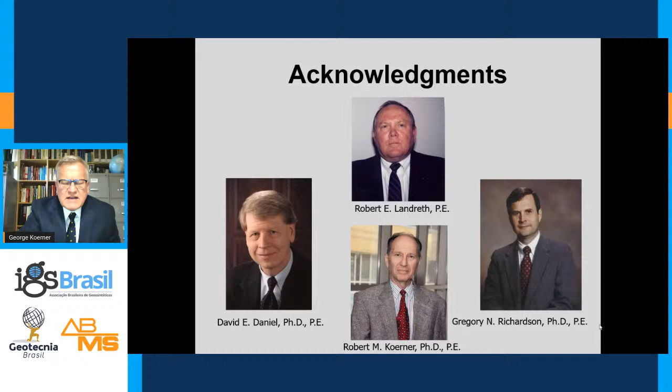As far as the background for this is concerned, you do have publications supporting what I am giving to you. The reference that I would suggest you obtain is the Daniel Koerner Waste Containment Facilities. It's an ASCE publication. You, however, can also get this document, just about 90% of it, free of charge from the US EPA off of the internet.

The objectives here, and we have to be very clear what the objectives of all this work that I'm describing to you is. It's certainly to minimize leakage, and the emphasis here is on the word minimization. Realize that the target is to get no leakage, but in truth, the targets are to get leakage below 50 liters per hectare per day, or that equals 5 gallons per acre per day.

The QA personnel on site, whether they be field technicians, inspectors, or QA monitors, are there to improve the state of the practice of what's going on, and also to help out with communication. This is communication of the stakeholders on the project. And please realize that we are protecting the environment. We are truly stewards of the environment, and it's our task with this series of events to certainly minimize the risk to the environment.

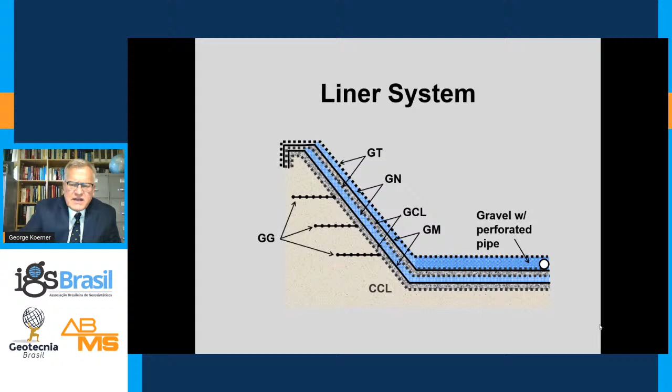Liner systems that are out there, I realize they're different depending on where you are, but double composite liner systems are typical in the United States. Here you see that in cross section. We start from the ground up, the subgrade, and then typically a geomembrane, GCL, then a drainage net, a geotextile over top of that for a filter system.

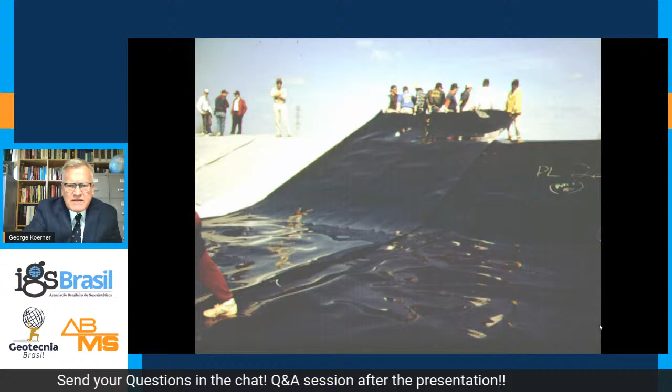This is the detection system, then another membrane GCL, which is a composite liner system over top of that. Here you see the entire liner system in its glory: the subgrade soil, the GCL, the geomembrane, the net, the textile, the GCL, the membrane, and then a heavy needle punch non-woven textile system.

This liner system is replete with geosynthetics. We're typically doing long longitudinal cells, and it's staged and managed construction.

Now let's go to the top side. You see again a composite liner system, typically a GCL with a geomembrane over top of it. You have a gas venting layer underneath that, and then on top side you typically have a drainage geocomposite and some sort of veneer reinforcement over top, and quite possibly a geosynthetic erosion control material over that.

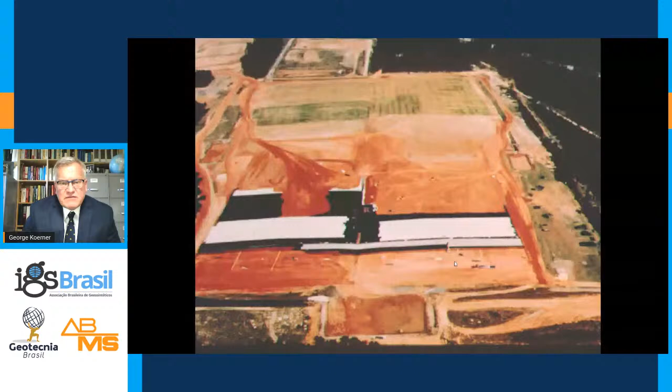They're complex covers as well. This happens to be at a low-level nuclear facility at Savannah River. You see the cross-section; the geogrid was even installed for minimizing differential settlement in the cover.

So you have the cross-section of the landfill. Here's the cover system—I even held back a little bit. There could be geogrids or geocomposites inside the waste mass if you wish.

But at a minimum, the final cover typically has 7 layers, inside the waste could have 2, and then the base material has 9. That's 18 layers, folks, of geosynthetics. And if you're in the waste containment business, I argue that you're in the geosynthetic business.

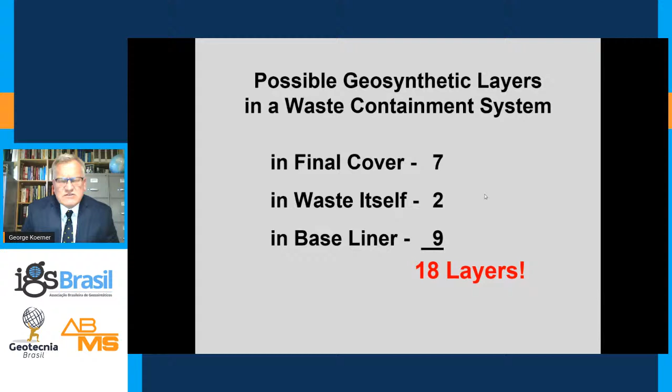You have to be competent in this, and you have to know that these materials are tricky. They're not self-evident, and we'd like to show you some of these tricks in regard to this presentation today.

In most cases, you are taking a geosynthetic and trying to make it equivalent to natural materials. Most, if not all, regulations allow this technical equivalency. The regulations, though, will rarely tell you how to illustrate that, and that's typically the role of an engineer. Nevertheless, geosynthetics have been generally accepted, and this table generated by Daniel Koerner and Richardson shows these equivalencies quite readily.

When you have barrier systems, they typically in a natural material were compacted clay liners. For geosynthetics, they're usually geomembranes and GCLs, or a composite of the two. The barrier system—geomembrane CCL, and then geomembrane CCL GCL—is quite typical.

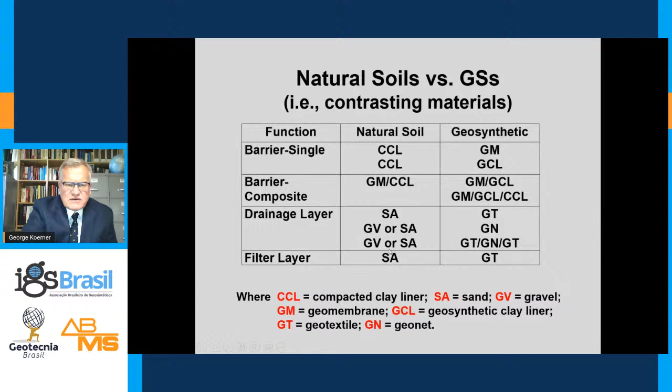As far as drainage layers are concerned, they're typically sands and gravels in the natural environment. These have been replaced in large part by textiles, nets, and geocomposites. In regards to filters, we typically have sand, and now we have a plethora of geotextiles which can be used in this case.

You should understand the organizational structure of the QA component and QC component—these are the stakeholders, so to speak. You have an owner of the facility, a designer of the facility, the QA organization which is typically separate, then a permitting agency, which could be both state and federal, a program manager and contractor, and obviously the soils component as well.

These stakeholders typically have a minimum qualification associated with it. The designer typically has a PE license. The manufacturer has experience, and typically there's a given number of 1 million square meters of material produced. The installer has experience as well and might have a certification. MQC is typically ISO 9000.

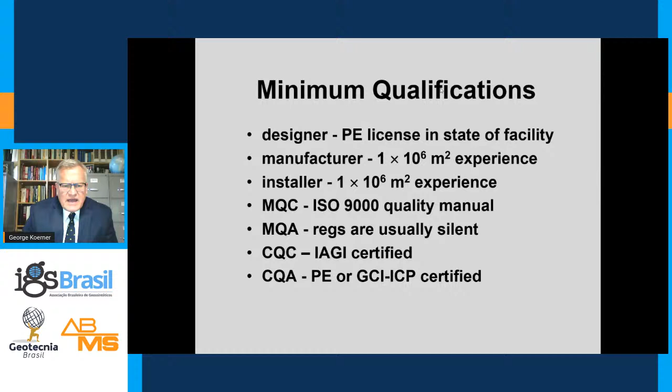MQA—the regulations are typically silent in this regard, but we're seeing them being pressed a little more as far as CE marking. CQC, as far as construction quality control, this is IAGI certified. We're seeing the installers, and many in South America having this IAGI certification. And as far as the CQA, PE or GCI ICP certification for the techs.

You have to realize that the rules at a facility are governed by the plans and specifications. I can talk to you about minimum technology guidance and these suggestions that are made, but please realize quite apparently that the plans and specifications for a particular project govern how you're going to conduct yourself out there.

They're typically prepared by the QA organization. The purpose is to supplement or augment the plans and specifications. You present all the details in these documents, and it should be part of the permit process. The contractor and installer, as well as the QA firm, obviously need to read this and review it before bidding on the project.

There should be absolutely no surprises once the dirt starts flying or the polymers start flying. There is much documentation associated with this: daily inspection reports, daily summary reports, inspection and testing reports, problems and corrective actions, drawings and records, photographs, final document certs, document control lists, storage records, and on and on.

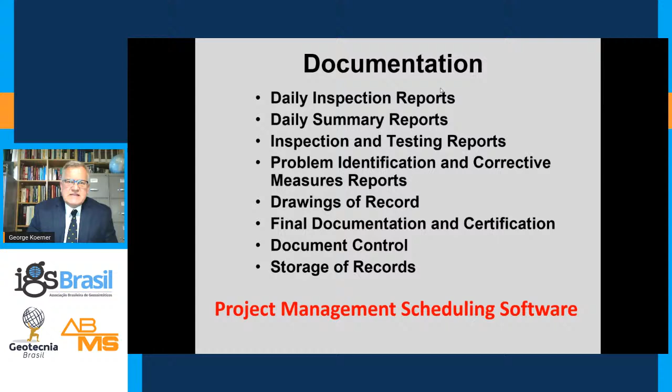All of this is now being monitored by project management scheduling software. Just like we're using remote and virtual ideas, this is paramount now in construction quality assurance. You see people out there with laptops and iPads making these documents, and there's a whole cottage industry supporting that project management and scheduling. There are meetings associated with this: a pre-bid meeting, resolution, pre-construction, and progress meetings.

All of this, which I have just described to you, is freely available in that EPA 600 R-93 document, which is available online and will give you about 90% of what the ASCE Koerner Daniel document gives you.

So that's a brief introduction, just a view from 10,000 feet of what we're going to talk about in this presentation. I realize most of you on the line are very familiar with geosynthetics and containment systems. However, I would be remiss if I didn't go through it just a little bit to catch everybody up on the same page of what I'm talking about with these polymers used in below ground construction.

Typically, the categories are membranes, GCLs, nets, textiles, grids, plastic pipe, and geocomposite. What I'm going to speak mainly to you about is the geomembrane, which is the polymeric barrier used in these containment systems. It can be smooth or textured.

It can be scrim reinforced. It can be different colors. Most of them are black, but some of them are white, and we'll go through all of that.

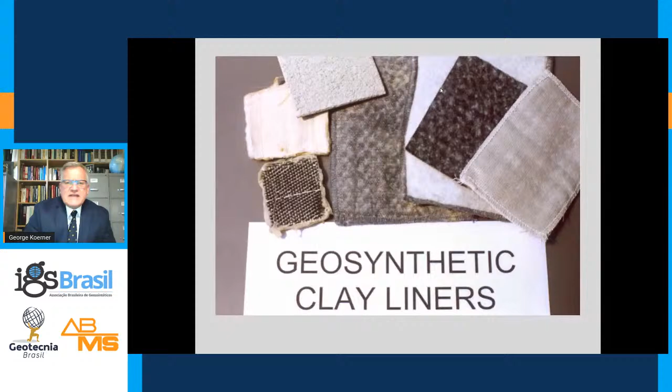There is GCL, which is typically bentonite clay sandwiched between two different geosynthetics. This clay swells profusely, it can absorb 300% moisture content, and it supplements or replaces a compacted clay liner and is used with the geomembrane as a composite liner system.

You typically have geonets, or in Europe they're called geospacers. These materials are three-dimensional, and they can transmit fluid, either gas or liquid, in the plane. They have a transmissivity associated with them. There's biplanar as well as triplanar nets, and it works well for leachate collection and removal systems, as well as detection systems.

Probably the oldest of the geosynthetics are geotextiles, two major varieties: non-woven and woven materials. They can solve a plethora of different issues, and certainly are well received and well used throughout waste containment.

Geogrids are three different types: punched and drawn, coated, which is typically polyester, and strap type. They almost always reinforce soil. Soils are notoriously poor in tension, geogrids are excellent in tension. The composite of soils and geogrid can be equated to concrete and steel — same scenario there. The geogrid, like steel, is taking the tensile forces.

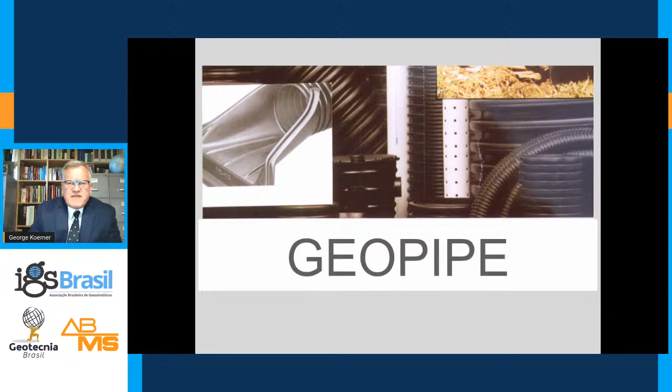There's plastic pipe. This can be perforated or smooth. It can be corrugated. Typically, the pipes that are available are polyethylene, HDPE, and PVC. You then can have a composite of these materials, which are addressed, forming just the endless array of geocomposites.

You should know the primary function. Here you see the different geosynthetic types that we went through. The primary functions are separation, reinforcement, filtration, drainage, and barrier. The geomembrane and GCLs will behave as a barrier.

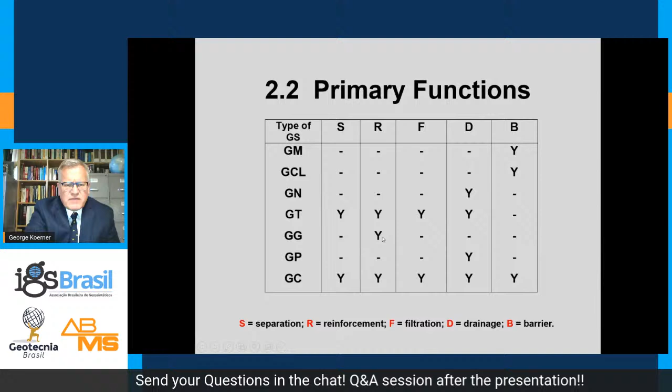The net will behave as a drain. The textile can behave as many things, and it even could behave as a barrier if you shot it with a bitumen. Geogrid is reinforcement. Geopipe is drainage, and then obviously a geocomposite acts as all of them.

This equation is how I would define an engineer: it's a factor of safety equation with a test property in the numerator. In the denominator, you have a design property. The test value is typically an ASTM or ISO test method, and the design value is typically, these days, a computer program.

You have testing issues. These are utilized through Committee D35 in ASTM or ISO TC 221. There's many standards which are available to you and essentially called out in specifications.

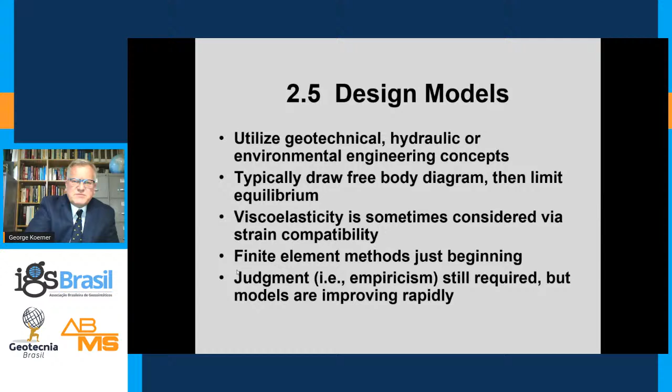As far as the design models, which are in the denominator of the factor of safety equation, they're utilizing geotechnical, hydraulic, and environmental engineering concepts. There's a litany of different programs available to you, and certainly some engineering judgment has to be used, not only in data entry but also the analysis of this.

When you go into a factor of safety, there are two critical elements associated with it. One is time — are these facilities temporary or permanent? And the other is severity — non-critical or critical. And I talk to people as far as criticality: is somebody going to die over this?

That's a good analogy for severity. You can see the factor of safety for these different functions varies considerably. Certainly when you get down to a barrier, I don't know how much leakage is allowed. Obviously, I gave you targets earlier on, but if you want to get better than those targets, certainly the factor of safety would go to the moon.

In regards to generic specifications, the current thrust is to move towards this and uniformity. This is a major effort at our institute, and please realize on geosynthetic-institute.org, these specifications are available to you. I should point out to you that currently these specifications are being translated into Spanish. Certainly they can be translated into different languages around the world, and Portuguese might be next.

The role of the QA personnel is certainly to observe and document. They're basically the owner's eyes out in the field. The consultants that provide these services are certainly trying to minimize potential liability, and they're providing documentation of what was built and did it conform to the plans and specifications. Good QA, though, is more than that. It leads to project success, and certainly it's an assistance to all the construction managers out on the project, and ultimately the owner thinks that it's a worthwhile expenditure.

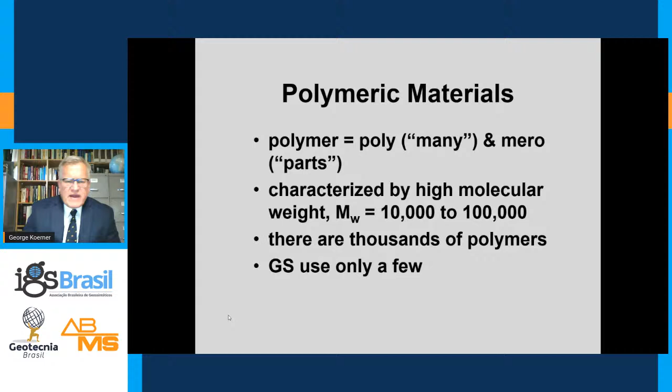The chart above now is defining the polyethylenes a little bit clearer in regard to density. Müller has presented this. Density is directly related to crystallinity. The more crystalline the material, the more chemically resistant the material. Also, the HDPE has very little branching in its backbone. It's very resistant to chemicals, and it's why it's used in liner systems. Linear low density has a little bit more branching, but also has a little bit more flexibility, and that's why it's used in cover systems.

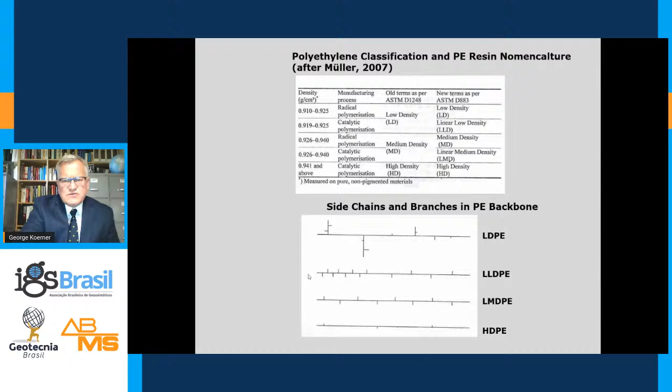Please realize I say HDPE, but this is a formulation. There's a recipe associated with this. The vast majority of the HDPE, or polyethylene, is resin, 95 to 98%. This material does have carbon black and additives associated with it. These additives and carbon black are only in there a few percent, but they're the expensive part of the formulation, and certainly needed to make these materials last a long time, even in harsh conditions.

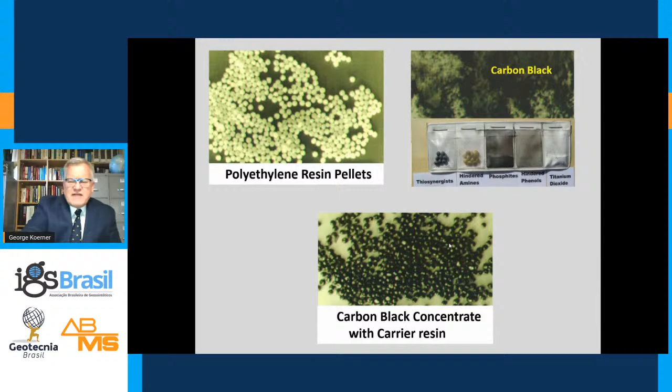A manufacturer needs to assure that this material is quality material and conforms to his internal specs. He also wants to make sure, he or she wants to make sure that this material is good material and what he paid for. So typically the quality assurance before the manufacturer will release this material into his silos at the plant is twofold: one is melt flow index and the other is density. They'll do these cursory checks to make sure the material is quality and what they're paying for.

Now we'd like to produce that geomembrane. And to produce that geomembrane, you typically have extrusion processes or calendaring processes. The olefin plastics that we showed you are the extrusion, flat die and blown film, and we'll show you both of that. As far as the calendaring process is concerned, that's typically PVC and also the scrim reinforced materials.

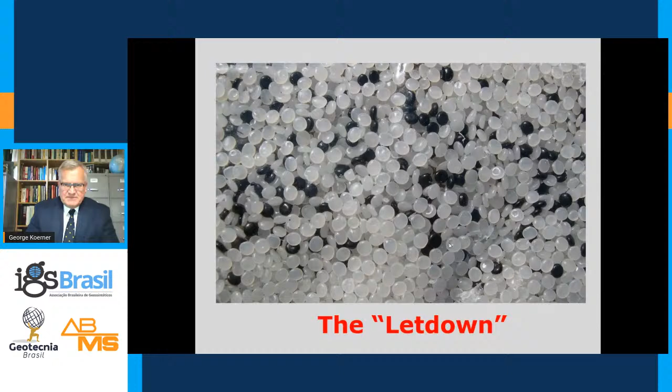So we take the resin and the concentrate, which is the carrier resin and the additive package and the carbon black, and then we have to make sure that we address regrind or rework. This is allowed at 10% into the letdown. And this is important, especially from a financial perspective for the manufacturer of geomembranes. However, this material has never seen use. It most often has never left the factory. This is quite a bit different than recycled material or reclaimed material.

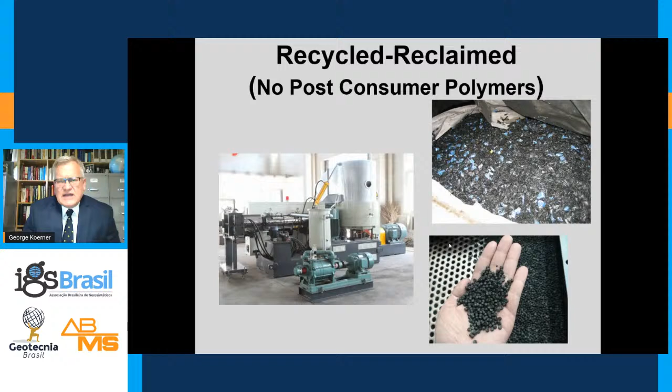Absolutely no post-consumer material is allowed in geomembrane manufacturing. This is strictly forbidden, even if it goes through a pelletizer and a washing mill. It's tough to detect, but certainly the formulation has to be guarded and protected against this.

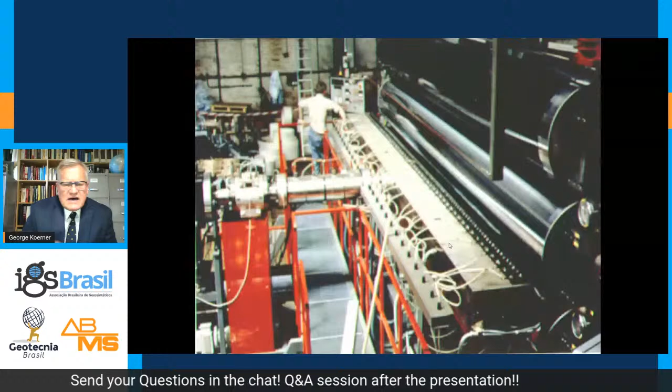Now we'd like to introduce that letdown and regrind into the extruder. That extruder is basically a large Archimedes screw with heaters on the side of it. It then feeds a die. In this particular case, it's feeding a wide mouth die. This die lip is about 10 meters across, so it's a very large die. It can be fed by multiple extruders and is spread out quite wide. Here you see the river of polymer, the river of geomembrane that's being produced.

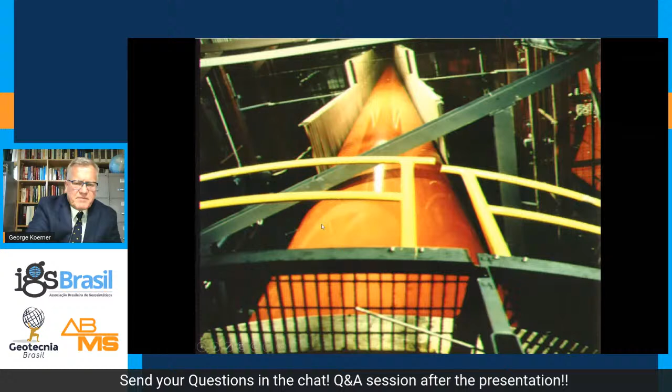It's on the cooling rack after the calendaring. This is very different from blown film extruding. Now the die lip is circular. We're looking down on it. The geomembrane is orange, just for a contrasting color - nice pictures to take. Now what we're doing is looking up at it. So the die is at the base here. It's a circular die, and the nip rollers at the top of the facility are here. So two very different manufacturing processes.

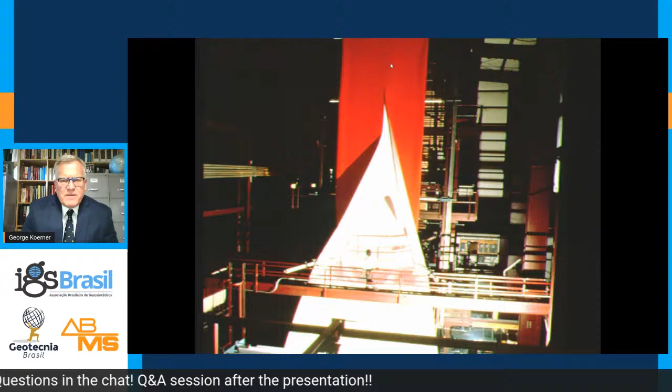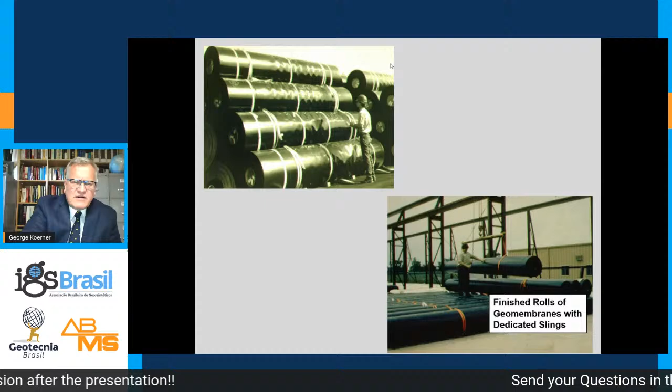You can add secondary and tertiary extruders to this for nitrogen expulsion or different colors. Here you had a different color inside, white. At the top of the nip rollers, it was slit open and then splayed forth to go on a roll-up wheel. These rolls are heavy after they're manufactured. You typically have dedicated slings associated with them, and this has to be moved around and labeled quite well. It's typically labeled on the outer wrap of the roll and also in the tube of the material. All of this is specified by the QA plan.

As far as texturing material, you have four different methods to texture. For blown film, it's typically a nitrogen expulsion. You can have a patterned roller for the die cast, or hot particle impingement. I've seen that in Chile as well as China and Europe. Hot foam lamination I see less and less of. That was a favorite of a manufacturer here in the United States, but we see less of that process now.

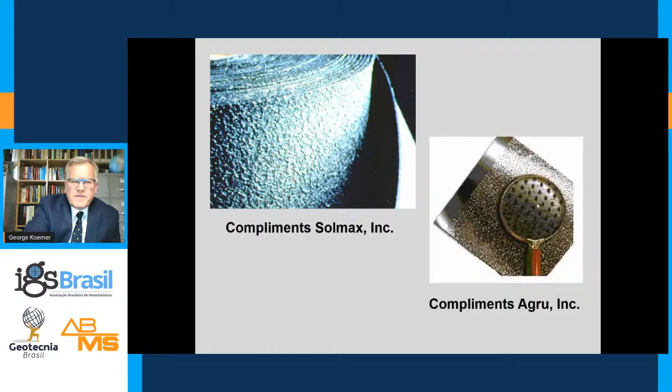The texturing is key for increasing the frictional interaction of the surface. Here you see the blown film in the upper diagram, and here you see a patterned texturing process. This has revolutionized the industry, particularly on steep slopes. You can have slopes now much steeper than 3-to-1. We see 2-to-1 as a norm, and this is obtained with textured geomembrane.

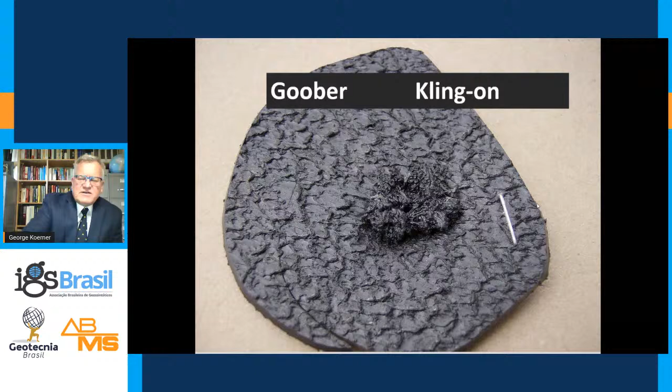In regards to textured material, if you're not cleaning the die lip, you can have excess material, which can agglomerate on the texturing surface and give problems. You can have gels or dirt inside this - the screen is not working well inside the extruder, and these foreign materials enter the sheet, which give problems and rise to stress cracking.

You can have problems with carbon black dispersion. These big carbon black agglomerates are problematic and certainly need to be taken care of. If you have water with a lot of humidity or a problem with water dripping on the equipment, it can bubble the material and cause problems.

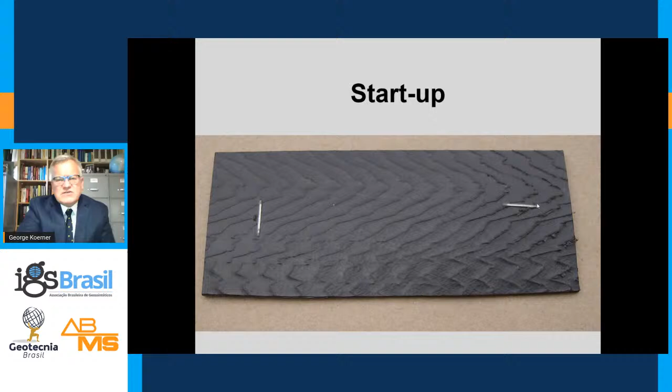You also have startup runs, which are between different materials - changing over from linear low density to high density, or changing in thickness. There could be startup issues. You don't want this material on your site. There could be problems with AO packages, which are found out in long-term problems. There could be problems with inconsistency or tiger striping of the material. Certainly, you didn't pay for this. This was not the material shipped for direct shear testing, and certainly is problematic and should be avoided.

Realize that there are specifications. These specifications are typically generic, which are the best specifications. You don't want specifications from a manufacturer - it's not that they aren't honest, but it's like the fox looking after the hen house. You need somebody independent producing these specifications. They typically address properties, test methods, units, limiting values, frequency, and then there's a warranty.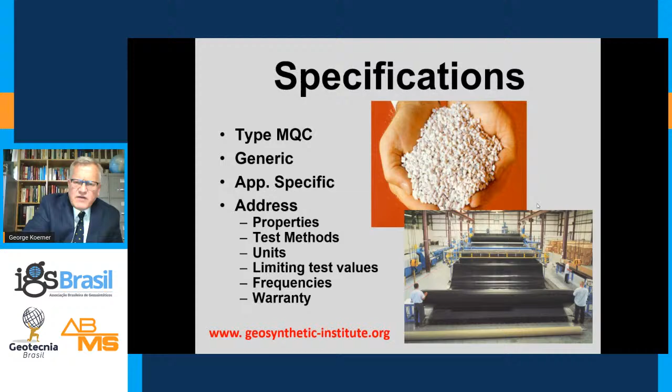There are generic specifications available to you. Our geosynthetic-institute.org provides them. They're openly available to you, and they're being converted into Spanish now, and hopefully other languages going forward. The test methods that are called out in these specifications should be tested by a manufacturer who's accredited, and also by a third-party laboratory which is accredited as well. They should be accredited to ISO 17025.

Certification includes CE marking, available particularly in Europe, but seen all over the world. Also certification of personnel looking after the site, as far as experience, referencing, and knowledge—they pass a test, then continue education. It's available to you, a very organized system, and this has been set forth by the US EPA. Hopefully it will take hold throughout the world.

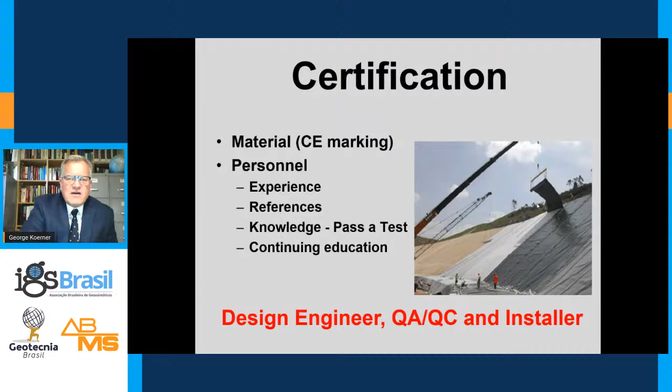Now we've manufactured the material and we'd like to ship it to the site. This is typically done in enclosed trailers or flatbed trailers, depending on the equipment for loading and unloading. QA sampling is best done at the plant. Transportation costs have become extremely expensive, so we need to head off problems as soon as possible. That testing is typically the responsibility of the manufacturer, occurring prior to shipping so you can inventory and hold any material that is off spec.

QA sampling in the field is certainly not as efficient, but sometimes it's called for. A failure if QA sampling is done in the field will delay the project significantly, and maybe the manufacturer doesn't have material inventoried that can be shipped directly to the site. Who pays for the shipping back and forth? This has to be arrived at earlier on in the project.

As far as shipping is concerned, this is typically done with organized equipment at the manufacturing facility. Here you see it's done with a stinger. This is offloaded typically with a low boy and a spreader bar, in regards to a container vessel.

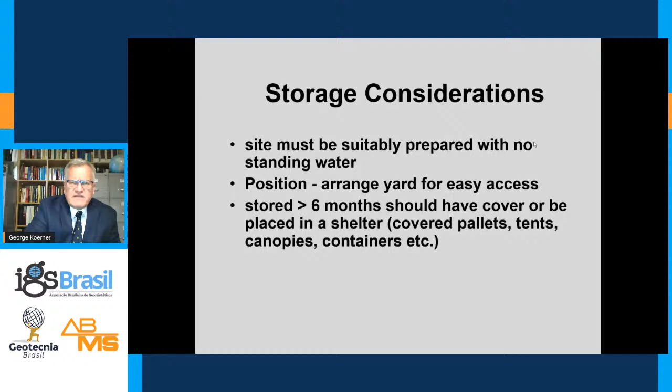If storage on the site is greater than 6 months, you should cover the material with some sort of shelter—typically covered pallets, tents, canopies, or containers. I'm seeing this a lot more often; owners are buying large quantities of geomembranes and storing them on site for extended periods. This is no problem, but they have to be stored properly and sheltered if it's over a 6-month period.

As far as field placement of the geomembrane is concerned, you have to prepare the subgrade. Follow the QA documents, follow the lines and grades. It has to be stone free and flat. If you're in the wintertime or near winter, in late fall or early spring, you should have no frozen ruts. Tire deformation should be less than 25 millimeters—nothing can be greater than 25 millimeters.

Remove folds in any underlying geosynthetic, and then subsequently get a subgrade acceptance letter. This is something the QA personnel needs to obtain from the earthwork contractor, and it has to be signed off by the owner.

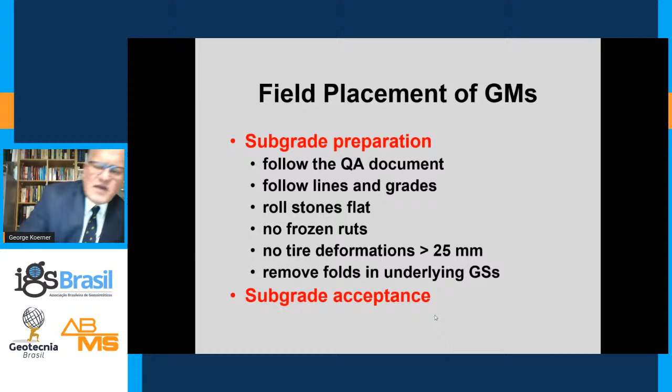To do this, you start with a site which could have some stony material, some greater than 25 millimeter size material. This material needs to be picked out—you can do that automatically with a stone picker or by hand. Laborers should have a bucket; they shouldn't be throwing the particles.

Obviously don't throw particles onto deployed geosynthetics. You then take a smooth drum vibratory roller and roll the site flat. This is to make the compacted clay liner ready to receive the geosynthetics.

This is a photograph I took at a site, and the owner asked me if this was appropriate. I said absolutely not. You can see where the material is near being punctured, where the material around the batten strip is under tension, and a lot of down-drag forces by the pipe boots.

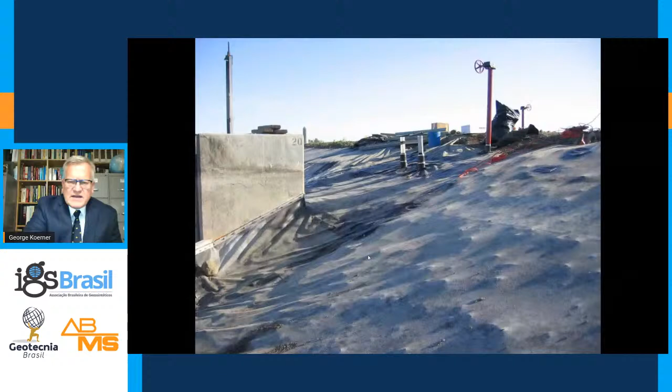This is totally unacceptable, and this geomembrane will be compromised over time significantly. It's an unacceptable way to install a geomembrane. You will have to protect the geomembrane when backfilling. Punctures by stones from both above and below are problematic. Cover soil must be free of stones.

If possible, the gravel leachate collection and removal system has to be separated from the geomembrane with a heavy needle punch nonwoven or a puncture protection material.

Geomembrane also cannot be trafficked by construction vehicles. There is some discussion around low ground pressure ATVs. This has to be agreed on, though, prior to the job. The ATV typically has special precautions, like entering the geosynthetic at a 90-degree angle, no fast starts, no on-off the geosynthetic. It has to remain on there.

In addition to that, if the material is to be trafficked, it should have a minimum thickness of cover soil over top of it. That's typically greater than 300 millimeters or 12 inches. Some regulatory agencies, like the Corps of Engineers, want 450 millimeters or 18 inches. But all of this is specified in the QA documents, the QA plans.

In regards to top side of the facility, the anchor trench detail is extremely important. This anchor trench is holding the geosynthetics topside. It has to be detailed in the plans and specification, and it's critical for safety, particularly when you get greater than a 3-to-1 slope or greater than a 30-meter slope in length, 100 feet.

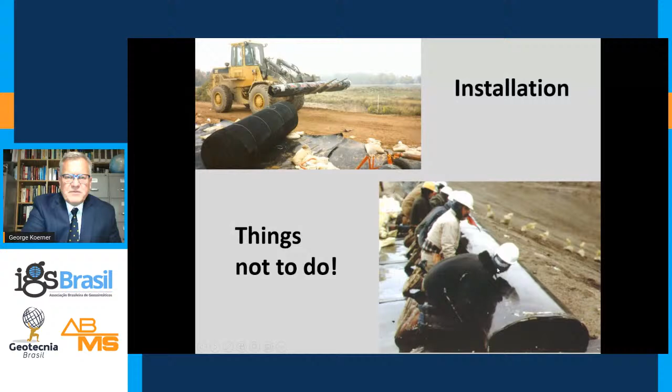This is a smooth geomembrane. The roll is extremely heavy, and they're about to throw it down the side slope in a very uncontrolled manner. This is totally unacceptable and certainly is not the way to do it.

Good delivery systems are shown here. This is typically equipment, a lull with an articulating boom and a spreader bar. This is equipment which is operated remotely. There's a toggle which the installer is here walking in back, making sure the overlap is correct. But this is certainly carefully managed and controlled throughout the system.

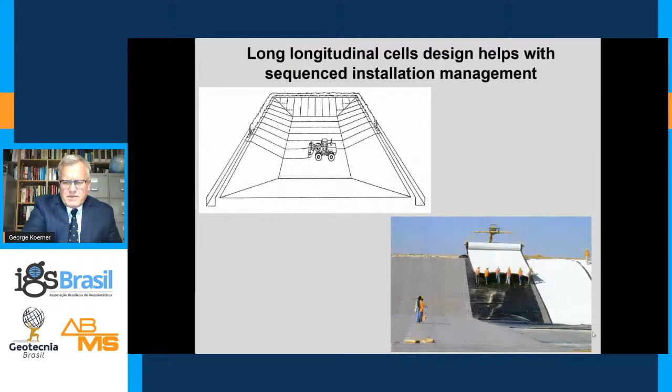You should address extreme weather, meaning extremely hot or extremely cold weather. There are recommendations in the EPA guidance documents which give you trepidation once you get colder than 0 degrees C, so the threshold is certainly at freezing. Special precautions for lower temperatures are needed. You can seam at lower temperatures, but you need to take precautions including preheating and moving enclosures, and the QA plans need to be specific in that regard.

There is direction both in IAGI as well as GRI GM9 which addresses these extreme conditions. In most cases, the QA personnel will have to consider extra trial seams. This is very important and is at the prerogative of the QA personnel.

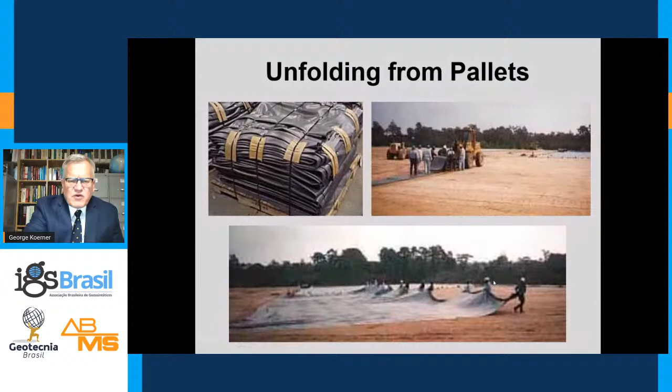I have been talking to you mostly about olefin deployment, either polypropylene or polyethylene. You should realize that PVC often arrives at the site in palletized form, much larger panels, and it's typically accordion folded and deployed in this manner. Off of the pallet, they back up, and a lot of labor is required to spread the sheet flat.

You do run into this predicament, particularly with surface impoundments. This is problematic in regards to the subgrade soil, which had much organics in it. Upon putting a black body over top of it, gas came out, or was expelled due to changing water table elevation, and ballooned underneath the geomembrane in regards to whales, sometimes called hippos.

You should certainly minimize subgrade disturbance. There is a concern with textured sheet - I showed you the rub sheet or Houdini trick, which is often used. There's also a concern with wind. These materials, you do not want them to be a kite - there are many cases of wind displacement.

The biggest item is not to leave the geosynthetic exposed too long. It should be managed or staged construction.

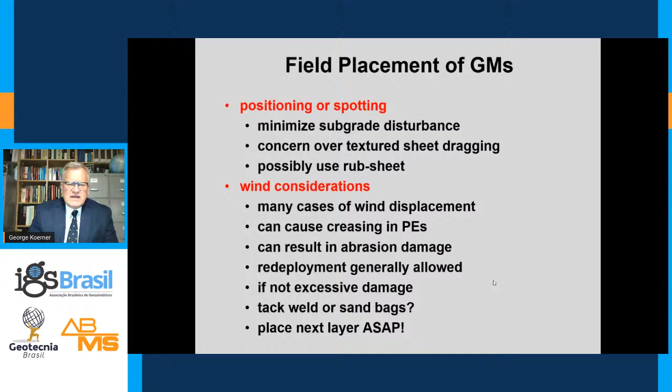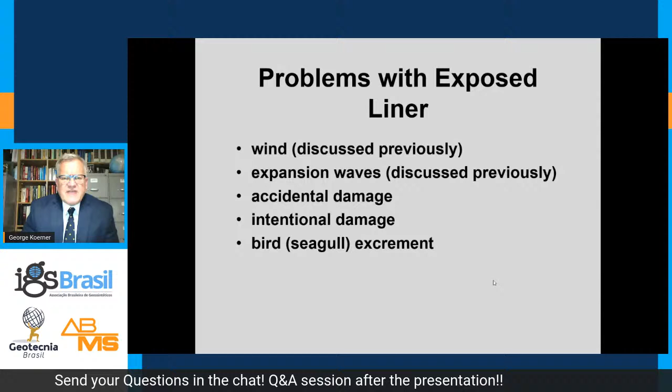There is a situation in regards to waves and wrinkles. Please realize most liners which are placed are composite liner systems of a membrane being placed over top of clay or a GCL. You can't entomb these waves because you will not have intimate contact. These waves or wrinkles fix into position, and this is a concern with residual stress and mini dams.

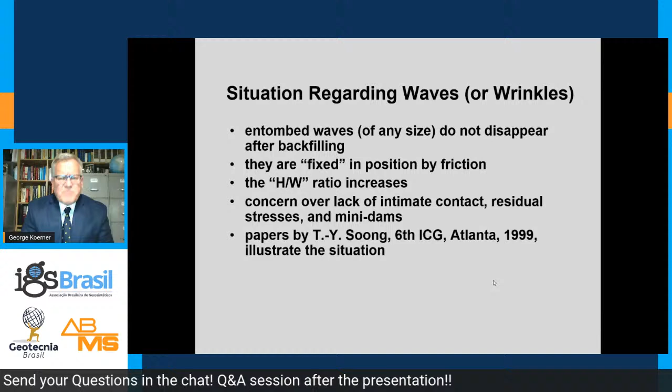There's excellent work that has been conducted on this. I point you in the direction of T.-Y. Soong's work with Bob Koerner. There's also work at Queen's University with Professor Rowe and Brachman at the QUELTS up in Queens, which are very good in regards to this work.

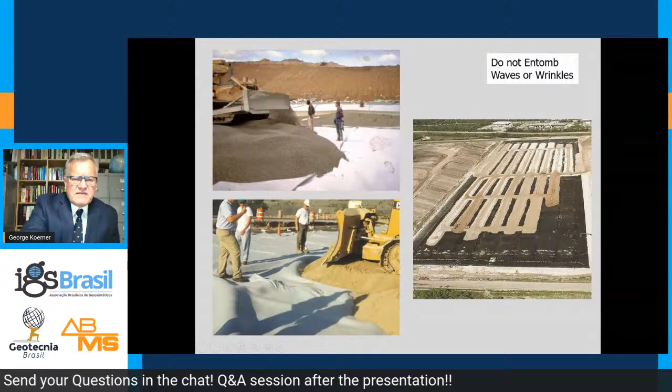It needs to be cut out and flattened, or you have to wait until a cooler period of the day until you continue this covering. You might want to stage this work incrementally so you get distributions of the wave.

There's a right way to do this and a wrong way, and certainly you need a press fit of the geomembrane against the underlying material. Concern over entombed waves is certainly lack of intimate contact, which we described in the theory.

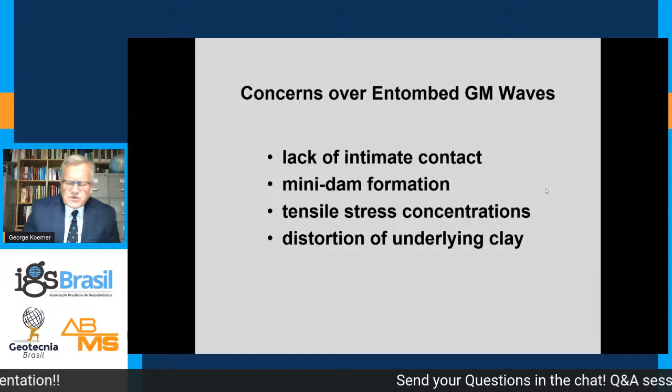Mini-dams which are forming and with sites that have limited hydraulic gradient thresholds, this is problematic. Stress concentration is problematic, and also a distortion of the underlying clay or GCLs.

Fixing berms and piles - this is available over in Europe. A company by the name of Schicketanz has certainly championed this with thick geomembranes in Germany and Austria.

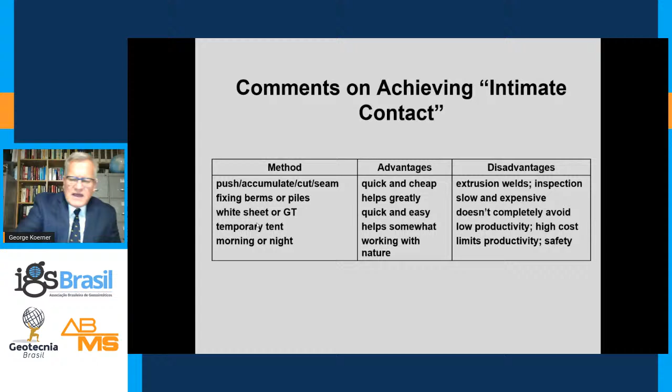White sheet and white and light colored geotextiles help. If you decrease the surface temperature of these membranes, you certainly have less wrinkling. If you can control the environment either with tenting or support structures, or do work in the morning or late at night, this is certainly proactive and will help you in regards to intimate contact, which is extremely important.

Okay, now we're moving on to seaming and joining of these geomembranes. Leaks do occur due to poor field seams. Factory seams are much better. Details around penetrations are certainly very important, and around appurtenances.

The crew must be well trained, and there is a requirement in some places that they're certified. The equipment must be maintained and is certainly tracked. These expert systems track both the operator and the equipment that they're using.

There are manufacturers that do have Teflon white strips, which are pulled off right in advance of seaming. There are heaters like salamanders that heat the location, or cases where you're wiping a location free.

Most of the membranes which we see, even textured membranes, have a smooth edge, and this is good for seam quality. Tie-in seams are quite ugly.

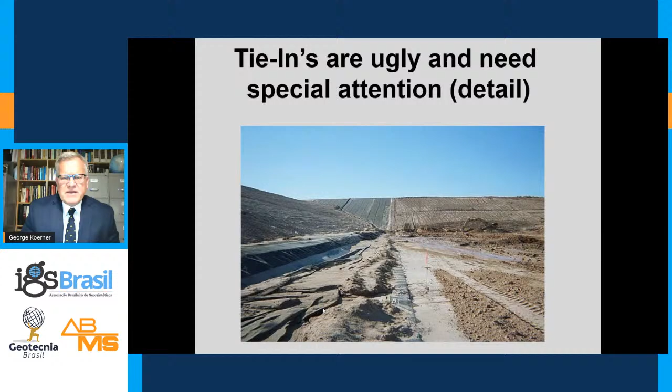You sometimes see a lot of elaborate protection systems. It can be with plywood or other geosynthetics which are pulled up in advance of the seaming, but certainly should be thought about with great care.

As far as the seaming methods occur, it's very dependent on the type of materials which are used. The olefin plastics, which we described, are seamed thermally, either through extrusion or fusion welding. Fusion can be done off of a wedge or hot air.

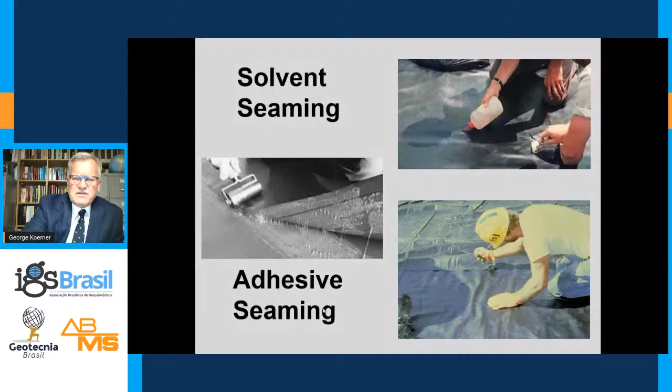Chemical seaming with solvents or bodied solvents are done with PVC and chlorosulfonated polyethylene. Adhesives are typically used with EPDM. Solvent seaming and adhesive seaming we don't see much of these days. Even PVC can be thermally seamed, although this is available to you, and we see it often in the roofing business, but not so often in the geomembrane field business except with EPDM.

Applicability of seaming methods - you see here the different methods versus the different materials, what's available and what's not applicable. This is developed again by Koerner, Daniel, and Richardson, and we're pretty much going to speak to just the thermal methods of seaming olefin plastics from here out.

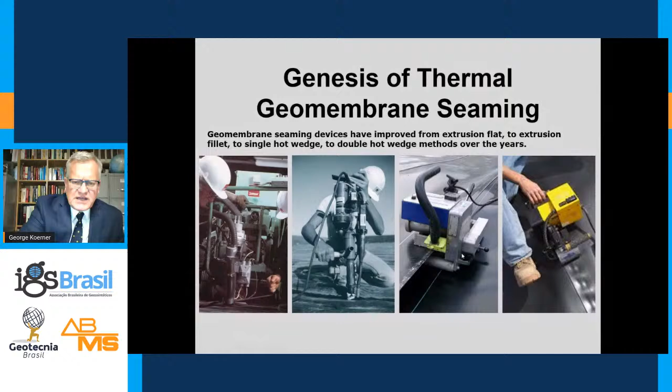There is a genesis of seaming of these materials. You see large flat extrusion, handheld extrusion, single wedge, and then double wedge material, which is available.

Wedge welding, typically with two tracks with an air channel in between, is the norm. This air channel is a non-destructive test, which is built right into the material. It's certainly the premier technique for production seaming, and it is highly automated and certainly the best type of seaming that we see out in the field.

This is the original patent from Pfaff, which was an Austrian firm, granted back in 1979. The big component of it was a Z-type frame with a movable wedge.

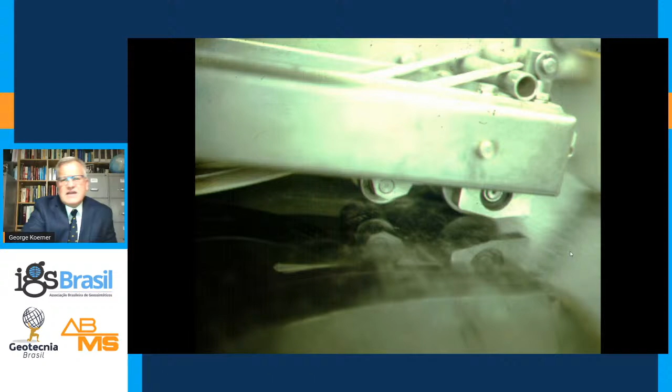You see the seamer here with a split nip roller, and the wedge is a brass wedge. The lower sheet is placed, the wedges move forward, the upper sheet is placed, and then the device is racked or moved to apply a normal pressure.

There are many different manufacturers of this equipment out there. You have to qualify the integrity of the seam as well as the integrity of the seamer or the installer. In this slide, we're making sure the overlap is correct, typically in the neighborhood of 100 millimeters so that the seam can be applied properly.

It's very different between longitudinal and butt seams. The butt seams on the roll ends are typically done with flat, solid wedges, where the longitudinal seams are done with split wedges using DualTrack hot wedge seaming. A single wedge seam is shown here - you see the area that's bonded plus the squeeze out.

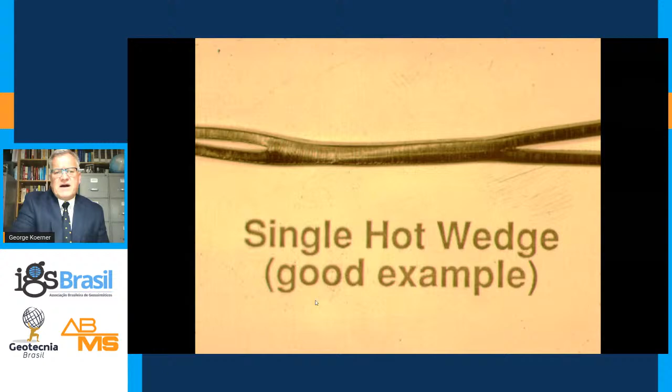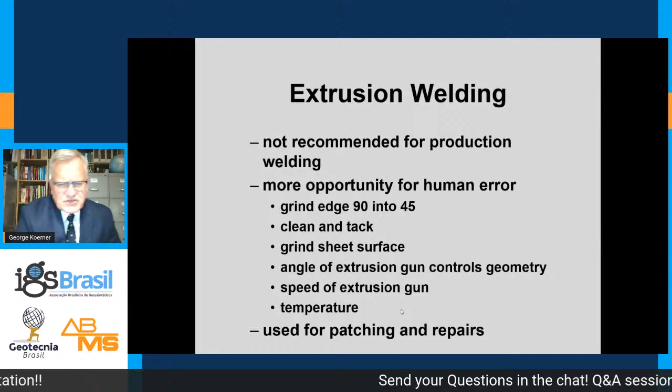That's wedge welding, very different from fusion welding compared to extrusion welding. This is certainly not recommended for production - there's a lot more opportunity for human error, but it's used on every site for patching and repairs. Regardless, it's certainly important, and you need to deal with it.

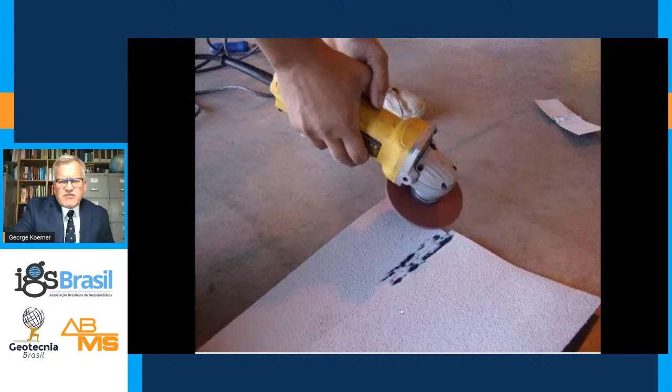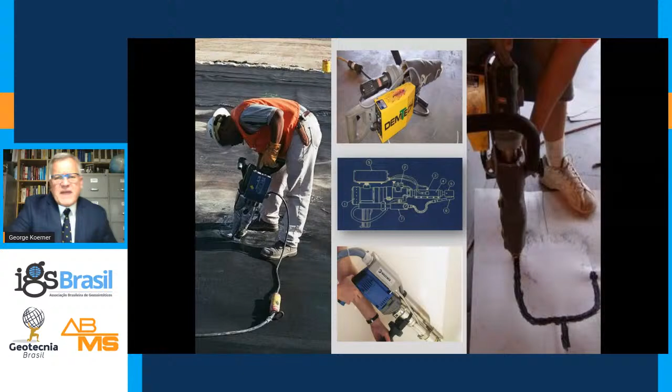It's a labor-intensive process, typically tack welding the material, then grinding the surface bloom off the material. You use an extrusion hot rod that's fed into the machine, and you have to cover over all the grinding of the material. This is what it looks like on site - back-breaking work, but certainly necessary for any repairs on site or details.

The extrusion bead flows over a Teflon shoe and is certainly smooth. The location of that bead is extremely important, and you should maximize this distance for the extrusion bead. In this particular case, it's a white extrusion bead. Maximizing that distance is critically important for a good seam.

You are covering all the material that's been ground away, and certainly twice during the day you are going to check the equipment as well as the installation personnel in regards to a trial seam. This trial seam is typically done in the morning and then after the lunchtime or noon break. It's used to qualify the seamer and their equipment.

It's made on excess scraps of geomembrane and typically should be done on the subgrade soil or the geosynthetic which you're installing. It should be tested immediately in the field with a field tensiometer. If it passes, you can go into production seaming. If it's no good, you get a retrial. If it's still no good, they need to go through retraining and repair or maintenance of the equipment.

This is very important - all of this is tracked, and it's important to see that records are kept throughout the project. This is the work that's done with trial seams. There's a field cutter and a field tensiometer. That field tensiometer is typically in a job trailer with climate control so that you get a good response.

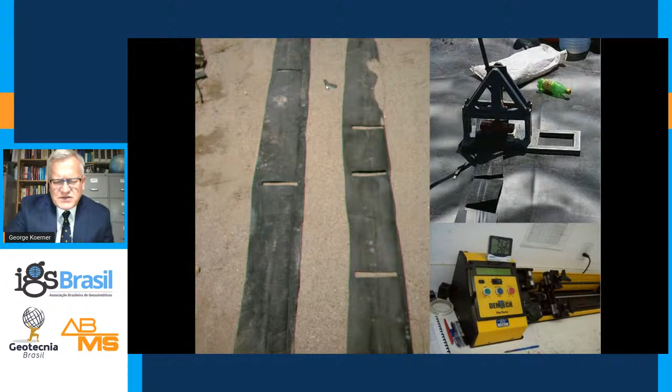This is very different from destructive seam testing, which is typically 1 in 500. We'll talk about this later in the presentation, but please realize trial seams are very different from destructive seams.

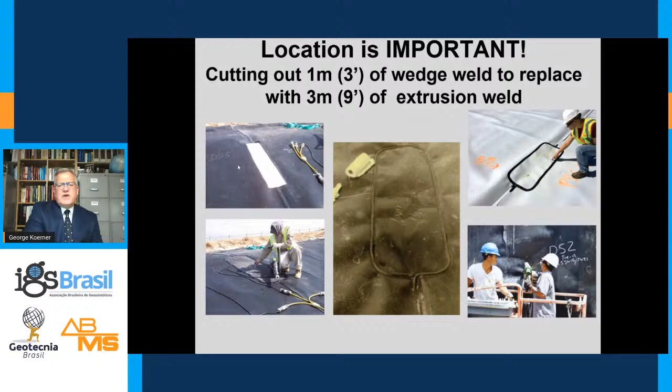Cutting 1 meter holes in the site is going to take out 1 meter of wedge weld, and it's going to be replaced by 3 meters of extrusion weld. And what I showed you earlier is that the fusion weld or the wedge weld is much superior to the extrusion weld for this case.

To give you an idea of assessing this and to assess the integrity, GRI has produced 3 different practices. It's GRI GM 29, which gives a carrot and stick approach to expanding the paradigm of 1 in 500 feet for destructive seams. There's a method of attributes, GM 14, and control charting, GM 20, to reward good installation and to open up that spacing for destructive tests.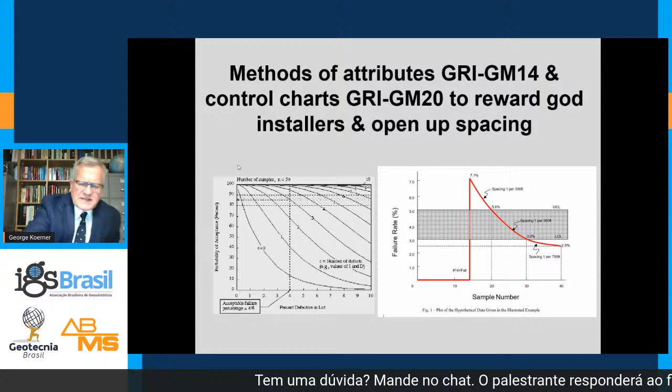As far as destructive tests, these seams are not tested in the field. They're typically sent to a third-party laboratory off-site, usually via Federal Express or DHL, and then tested in regards to shear and peel to determine the adequate bonding of the material.

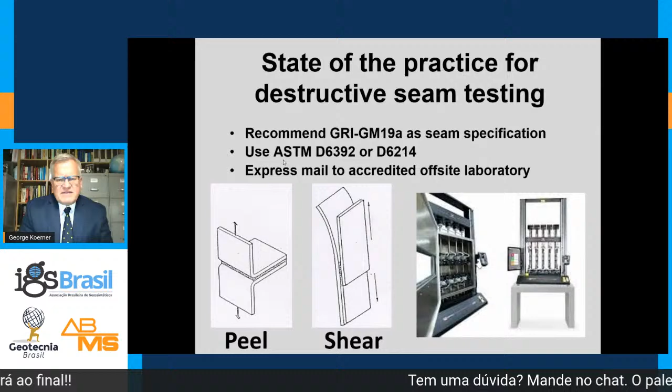Requirements are called out in GRI GM 19A and 19B for chemical fusion. You're using ASTM 6392 or 6214 for these materials, and typically the laboratories are conducting this on 5 station units, as you see here.

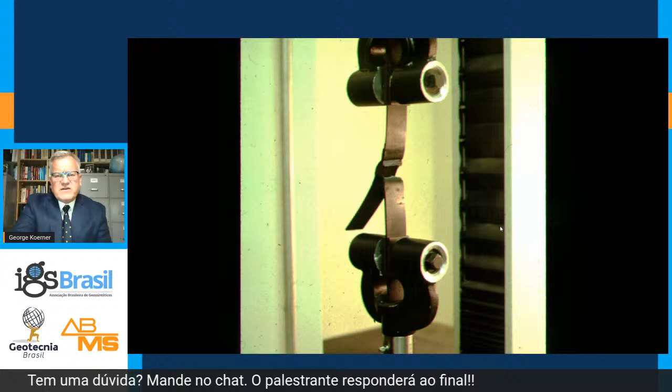As far as peel testing is concerned, we're looking at peel adhesion of the material. This is a measure of pulling the materials apart with 2 flaps. You're looking for 3 properties: peel strength, peel incursion or separation, and locus of break. Here you see it's set up in a continuous rate of extension. We're pulling this typically at 50 millimeters per minute, and then have a ductile failure of the material.

This is very different than the shear testing of the material, which is the type of stress the material would see in the field. You again are looking at 25 millimeter wide specimens. You're testing them and looking for a shear strength, an elongation at rupture, which has to be greater than 50% typically, and then a locus of break indication.

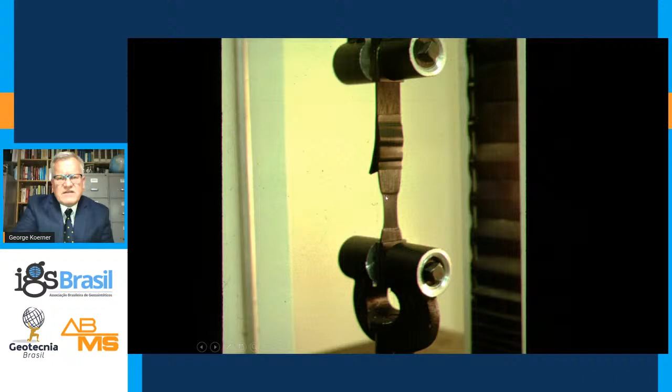Here you see the shear test set up. We're pulling, and here in the bottom you see a yield of the material. The bond was stronger than the material, which is a good indication. Again, a ductile failure - you'll see those fibrils of the material, and this is a very successful test.

Seam acceptance criteria, like I said, is based on GRI GM 19A or B. They're available on our website. You're always looking for a film tear bond, which is a ductile break where the sheet fails and the seam does not. You're looking for minimum delamination, particularly in peel, and then the seam strength - the shear is 80 to 95% of the sheet strength, the as-received sheet strength. The peel strength is anywhere between 40 to 62% of that strength.

That's destructive testing. Now let's take a look at non-destructive testing, which is certainly a considerable activity on site for the QA personnel. I told you that the Fusion DualTrack hot wedge seam was the premier method for seaming, and it's also the premier test for evaluating the seam. All geomembranes can be seamed in this manner, and there are numerous alternatives for non-destructive testing.

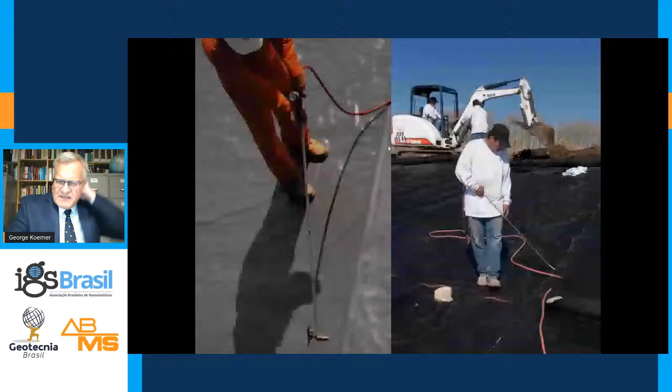The most basic one, particularly that's done for solvent seaming, is air lance testing. This is jettisoning high pressure air through a nozzle, and what you're looking for is a flapping or unbond. This is done typically on scrim reinforced materials or PVCs. I never see it being done on olefins except for very thin polypropylenes.

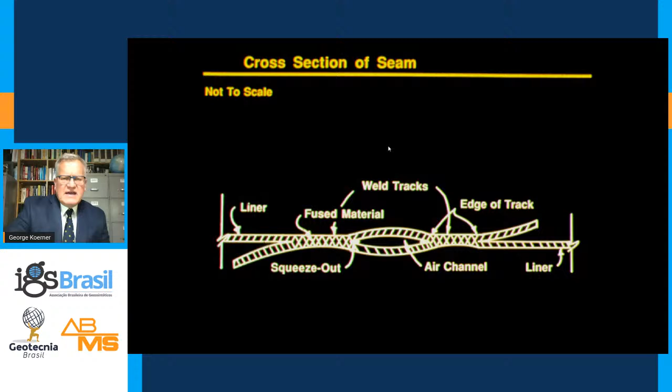The DualTrack air test is certainly the premier test. You've seen this cross section before, and that air channel is very important to the success of this test - it certainly needs to be open and clear. You need to isolate the air channel, and you do that by closing off the two ends. That's typically done with hot air, Leister seam, and wide mouth vice grips.

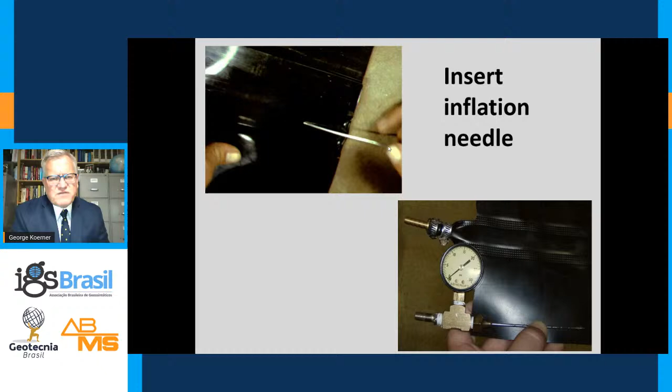You then will insert an inflation needle into the air channel. There are many different needles and apparatuses which are used for this. You certainly need a good seal, and you can't have a leak in this regard. You then inflate this with a pump, and then disconnect the pump at the start of the test.

As far as the test is concerned, the criteria is set forth with GRI GM6 for air channel testing, the specification. The specifications are based on geomembrane type, thickness, minimum and maximum pressures that are associated with those types and thicknesses, and a pressure drop over a given time. All of this is called out in the standard.

What you don't want to see are these aneurysms in the air channel test. This indicates poor seaming, and certainly is what the QA is after.

Documentation of this, again, is in an expert system. You see the recording of this in picture form from a site. It's typically a date, the pressure before, the pressure after, the hold time, and the time and temperature, and then the sign off of this.

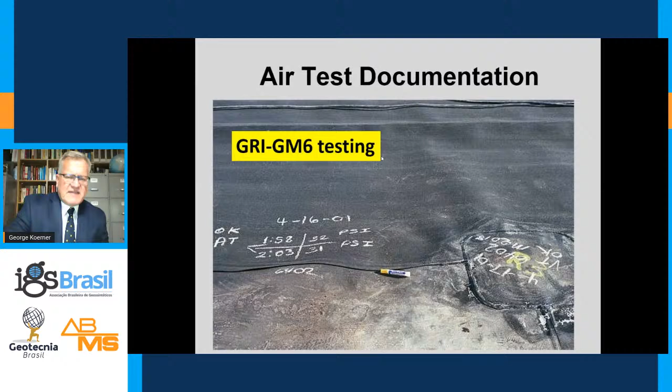A lot of photographs are being introduced into QA records. This is certainly very important, and in this day and age of expert systems and iPads on the project, certainly readily available.

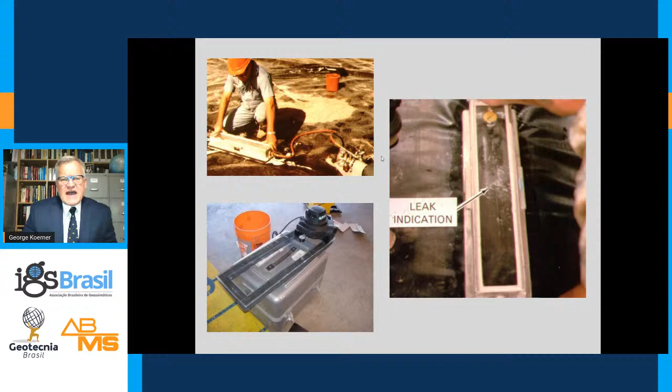Another non-destructive test is a vacuum test for extrusion welds. This is probably the oldest, an adaptation from the roofing industry. It's very labor intensive, and typically requires a soap solution put down on the geomembrane and then the vacuum box placed over top of it. You engage the vacuum, and what you're looking for is bubbling of that soap solution to indicate a leak.

But again, available through the US EPA, and I think heavily advisable. With all that said, in regards to non-destructive testing, you should note that the current trend in our industry is to use electrical leak testing of entire systems. It focuses not only on the seams, but on the sheet material as well, and it also can detect leaks after backfilling, which is extremely valuable.

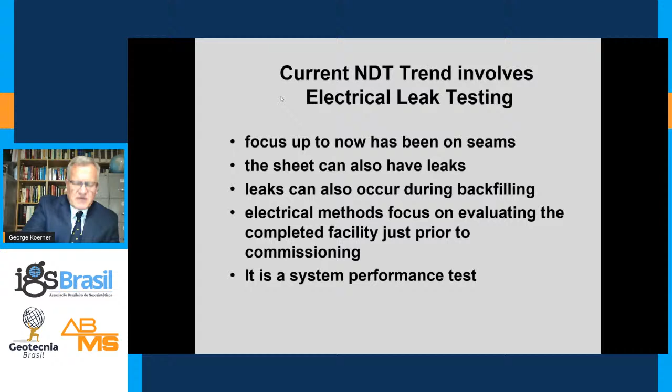There are a bunch of methods which are available to us. It's focused on the completed system just prior to commissioning the facility. And in truth, these tests, which I'm going to describe very quickly, are system performance tests, which are quite handsome and quite well received in our industry.

The concept of electrical leak testing is typically to use a DC power supply. You have a cathode, which is grounded beneath the liner system, and then typically a movable anode, which is either in the liquid or wet soil above. You're aided by a voltage indicator, and certainly there are many variations to this.

You can do this with water, either puddle or standing water. You can do this on soil which had been wetted. You can do this with conductive geomembranes or geotextiles in many cases. What you're basically doing is fishing with electricity, and what you'd like to see whenever there's a hole is there'll be a flip-flop in the voltage. This is particularly the case with the two dipole methods, either water-covered or soil-covered.

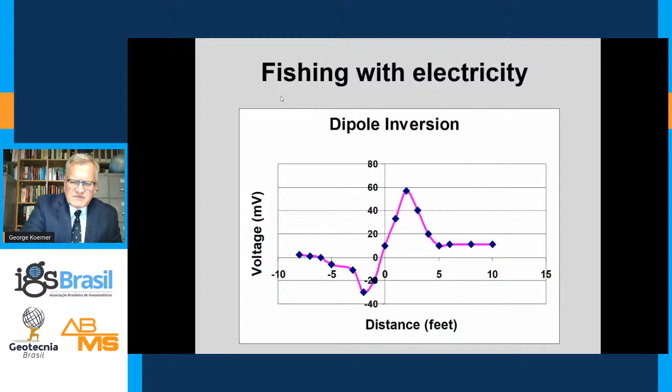The water-covered is certainly the premier technique where you can find the smallest holes. There's a lot of activity in this regard. TRI, I have to give them a shout-out. A woman by the name of Abigail Beck-Gilson has been working these standards through ASTM with a lot of help from others.

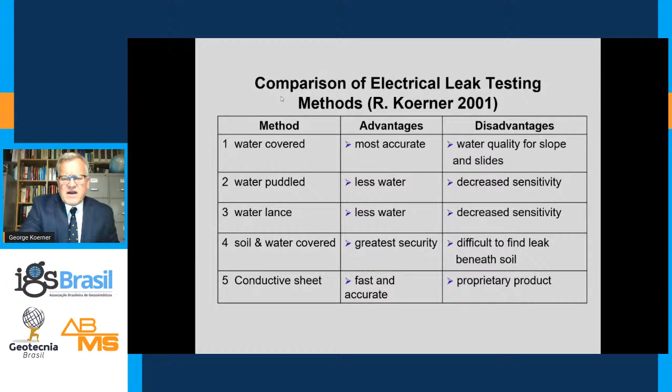Comparison of leak testing, sort of the pros and cons. Again, this is Bob Koerner's work back in 2001. He gives advantages and disadvantages for each one of these. You can read this yourself, but I can tell you that this is a tremendous success, and some states within the United States are mandating this prior to commissioning facilities.